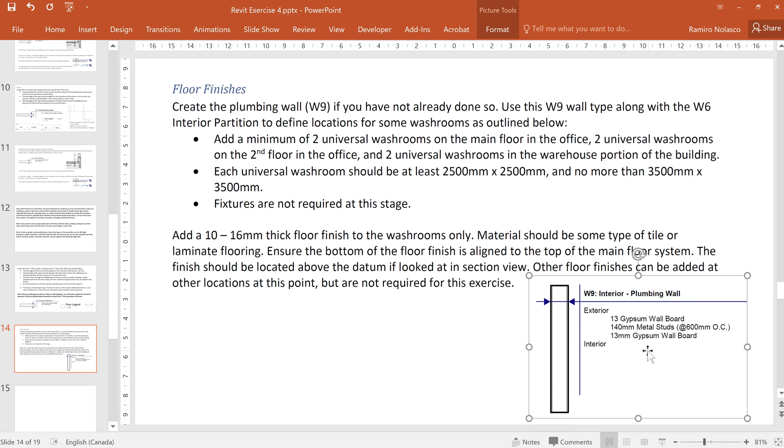So I'm here in my first floor and I'm going to create first a wall type. So WA, this is the shortcut. I'm going to use the interior generic for this one, and I'm going to edit the type.

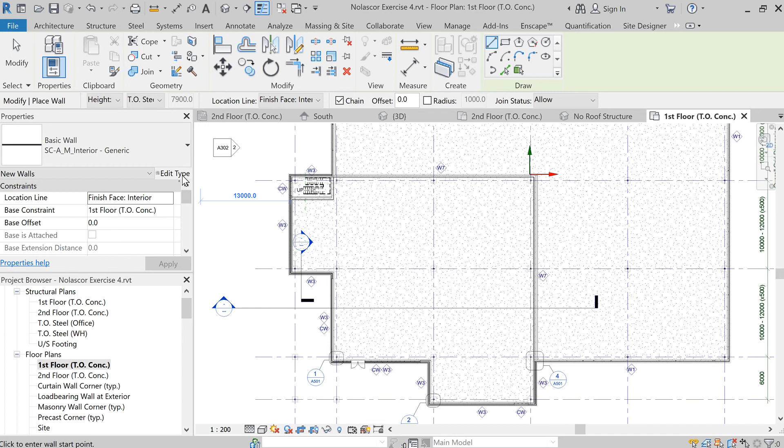Duplicate, and name it W9-interior-plumbing wall. Click OK, and make sure you change the structure, so edit the structure.

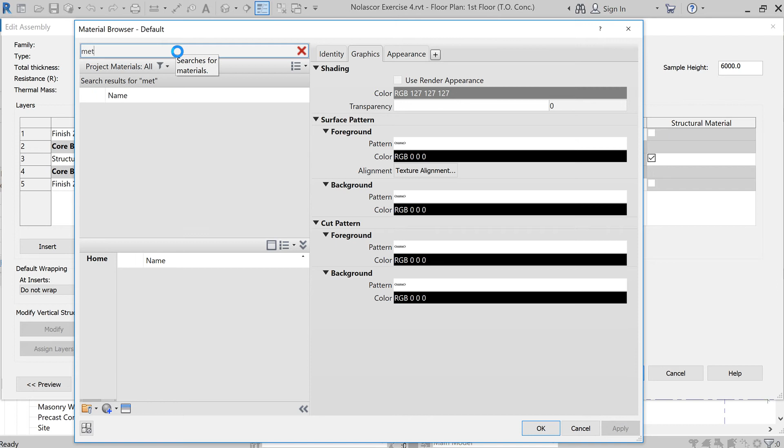For this one, we're going to use metal studs. Click on the browse button, look for metal stud. Okay, you can always change the color and appearance as needed. Click OK. Change the size of this to 140.

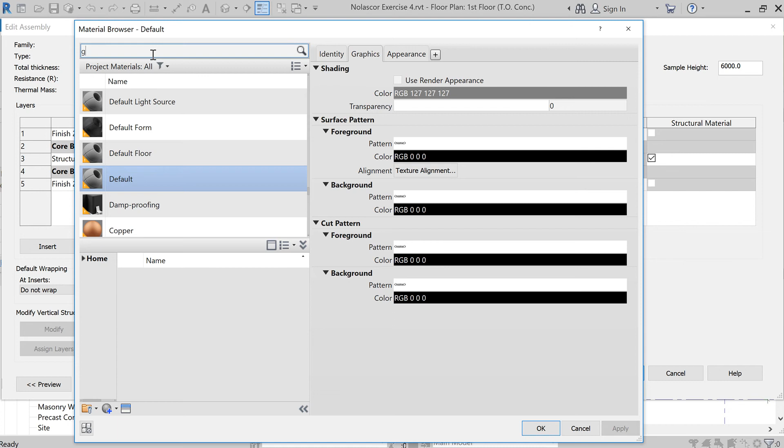Okay, for the exterior finish, we're going to use gypsum wallboard. Type here, gypsum wallboard, click OK. The thickness is 13 millimeters, and that should be the same for.

Let's change this to finish 1, just to form the habit of placing finish 1 in the exterior and finish 2 in the interior side. Not that there will be an exterior or interior side to this wall. So maybe that's why they place in finish 2. That's okay, just force of habit. For exterior side, you place finish 1. So you place one gypsum board on one side and then you leave the other to maybe place some electrical or piping system, and then you cover it. So that side will be the finish 2. I like doing that.

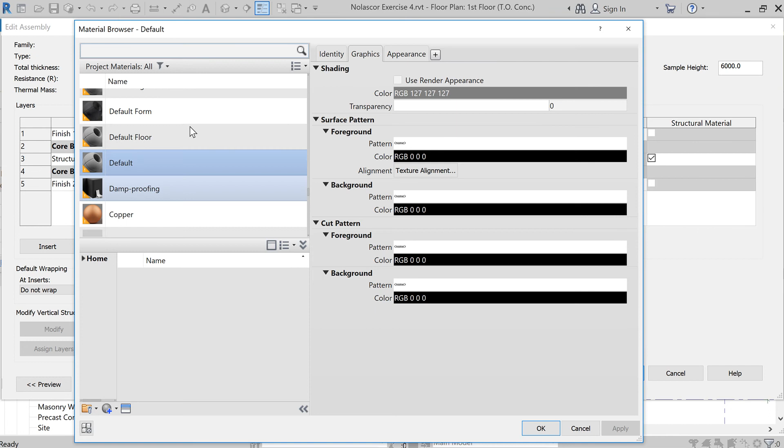Gypsum again for the finish, so same finish, click OK, and same thickness of 13. Click OK. Now that we have our W9 interior plumbing wall, click OK.

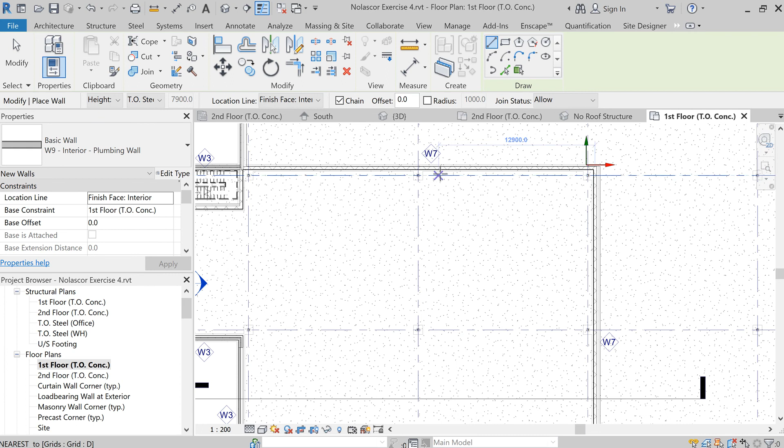And to create your interior walls, sometimes it's a lot easier to simply not mind the measurements yet. Create the wall, escape once — you're still in the wall command if you do that. Okay, and then hit escape twice, and it's a lot easier now to change the distances by clicking on the wall you want to move and changing the dimension.

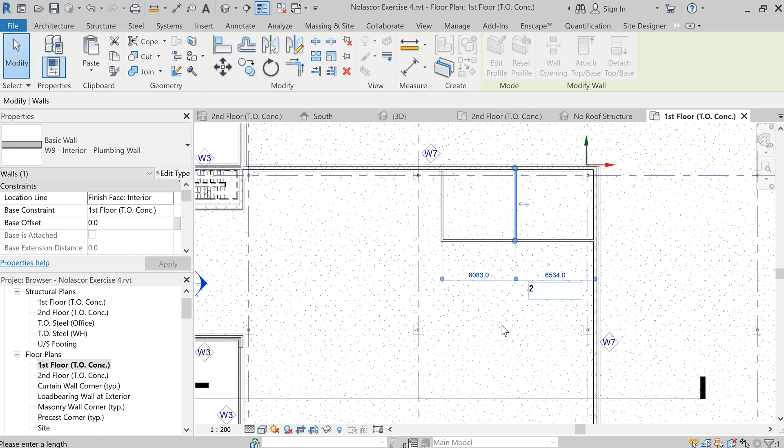So let's say I'll just use 2750 here, and that's 2750 to the center.

Now if you notice, you might want 2750 from the face of the wall or the walls, then you might want to go to the Manage tab and change the temporary dimension under additional settings.

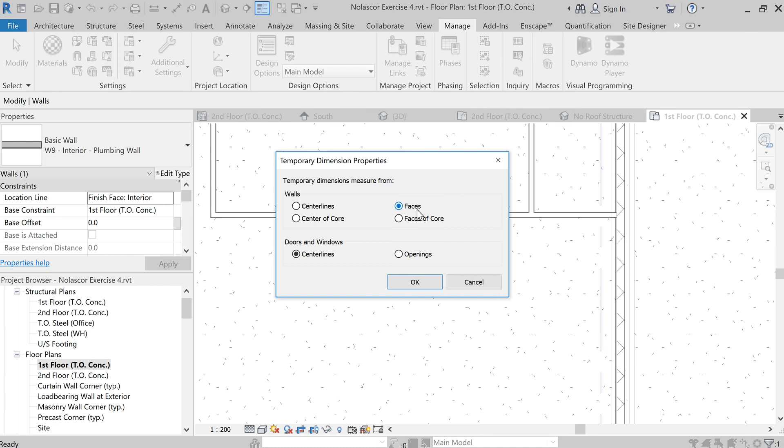Okay, so you'll see here temporary dimensions. Currently, it goes to the center of the wall. If you're using face of the wall more often, then by all means change that to faces. Click OK, so that this time when you select this, it will give you the interior dimension, or from face of the wall to the face of the wall.

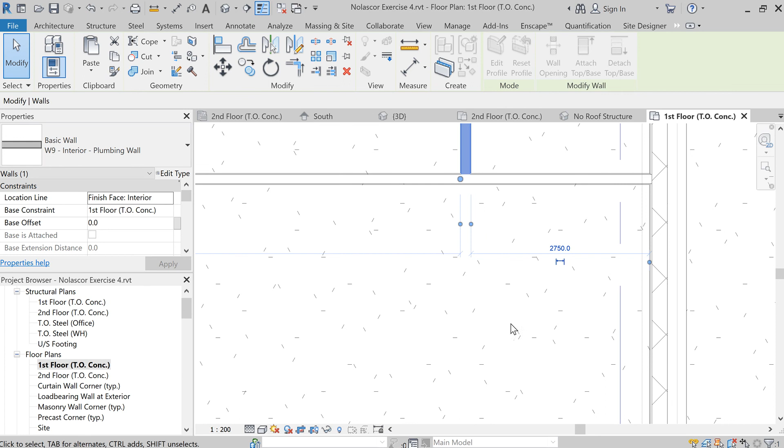So notice here our 2750 is now 2528. So I can maybe change that to 2750 this time. Change this also to 2750. Enter. Oops, my bad.

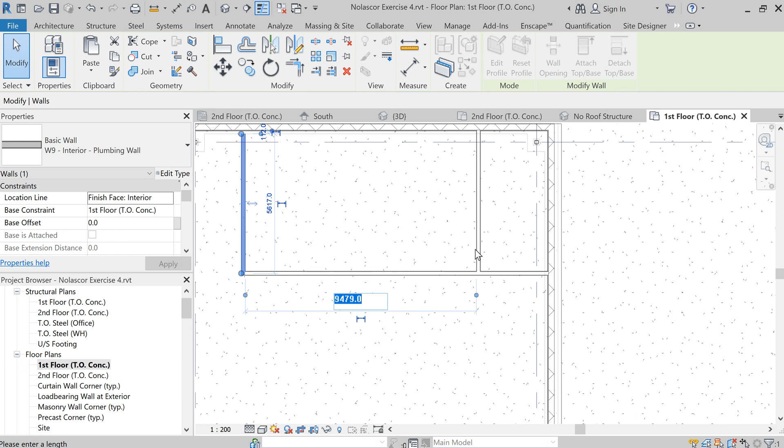See, you need to select the wall first, right? So don't forget, 2750. If you want to move this wall, select it first. Otherwise, it's this wall that's going to move to that direction. So 2750, enter. And then if you want to change this to 2750 as well, you can do so. 2750. And there you have it.

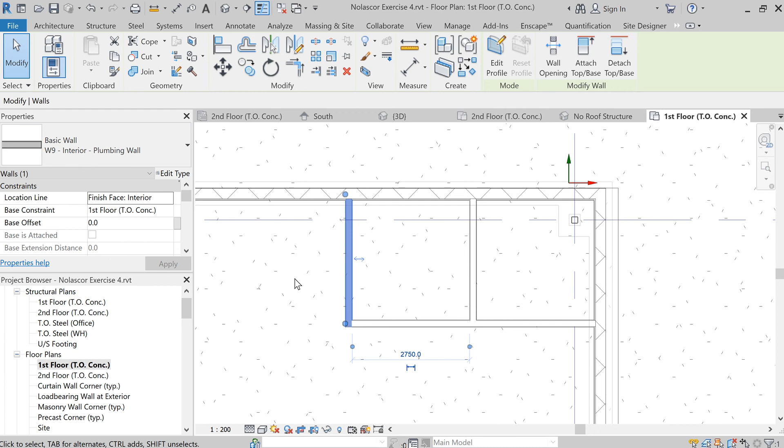We now have our openings. Now, this one here can go further. And that's how you build your interior walls, a lot faster, simply creating the temporary walls, no matter how big they are. And then you can change the dimension by selecting the wall and changing the temporary dimensions.